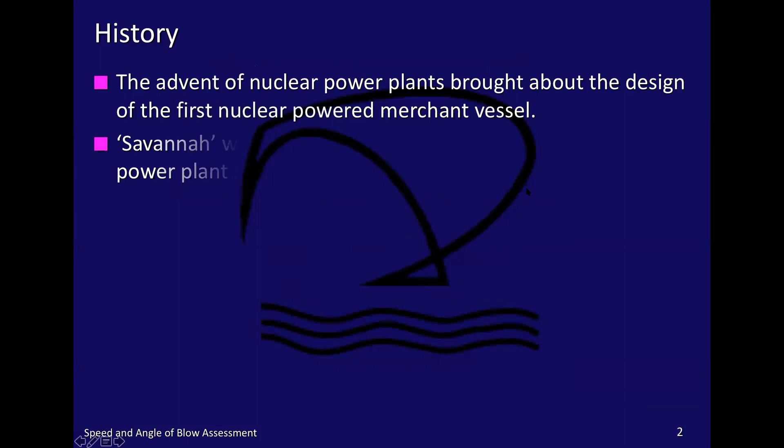Here we go. The history of speed and angle of blow assessment. With the advent of nuclear power plants, this brought about the design of the first nuclear-powered merchant vessel, which was the Savannah. She was launched in 1959 and designed with nuclear power plants supplying steam to turbines. That's the ship, and back in '59 she really was modernistic. She was more like an ocean-going trawler, really.

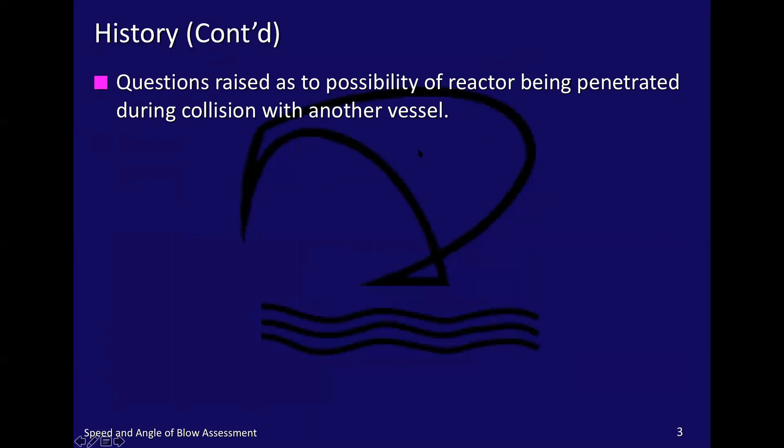But the problem was the possibility of a reactor being penetrated during a collision with another vessel, particularly with a naval vessel which might have a sharp bow. So the first research was carried out by Mr. Minorsky and later by Captain T.D. Halla. The research was carried out into the strength and scantlings requirements for nuclear vessels in order to safely absorb the kinetic energy of a collision, particularly with a warship which might have a sharper bow. Minorsky is seen as the authority on the subject, having derived a relatively simple methodology.

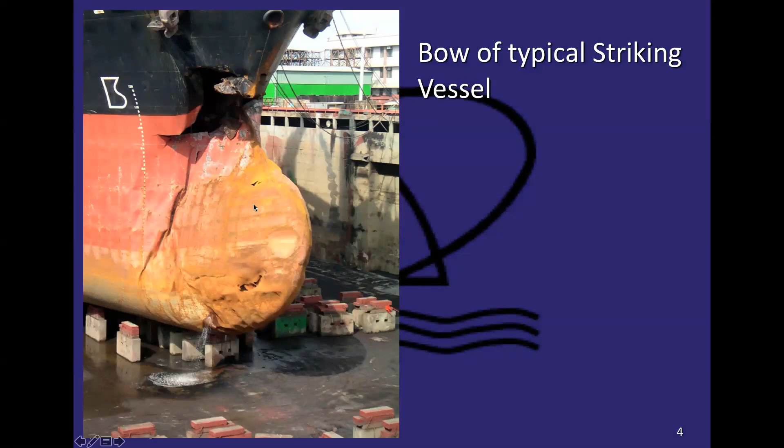So here we have the bow of a typical striking vessel. The bulb here has been moved back a couple of meters, moved up a little bit, and moved over to the port side slightly. This is the other vessel, the struck vessel. As you can see, I think this is number 3 and 4 holds, which now have beautiful indoor swimming pools.

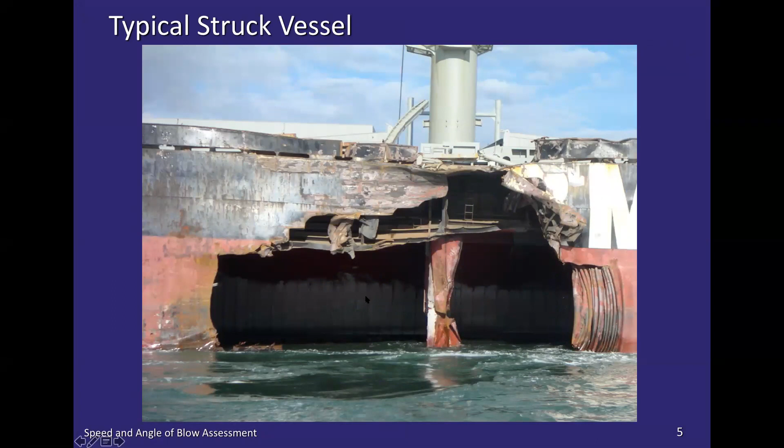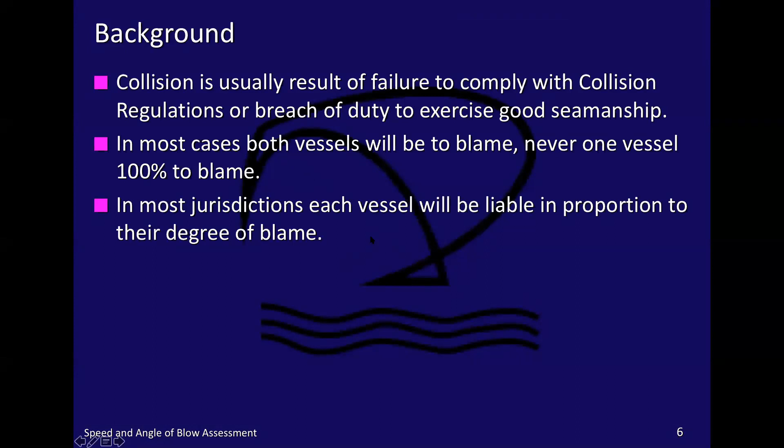The collision usually results from a failure to comply with collision regulations or a breach of duty to exercise good seamanship. In most cases, both vessels will be to blame, there never being one vessel 100% to blame. In most jurisdictions, each vessel will be liable in proportion to their degree of blame. The vessel claiming compensation for loss or damage will have the burden of proving the other vessel to be negligent. Consequently, events leading up to the collision must be established as far as possible. Witnesses interviewed, logbooks and records retained.

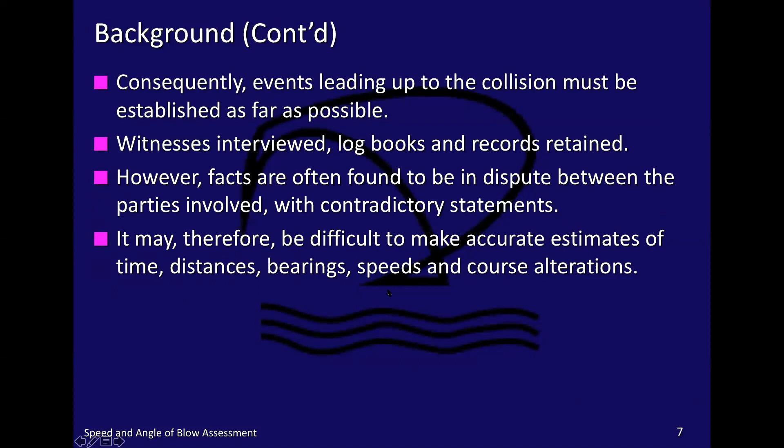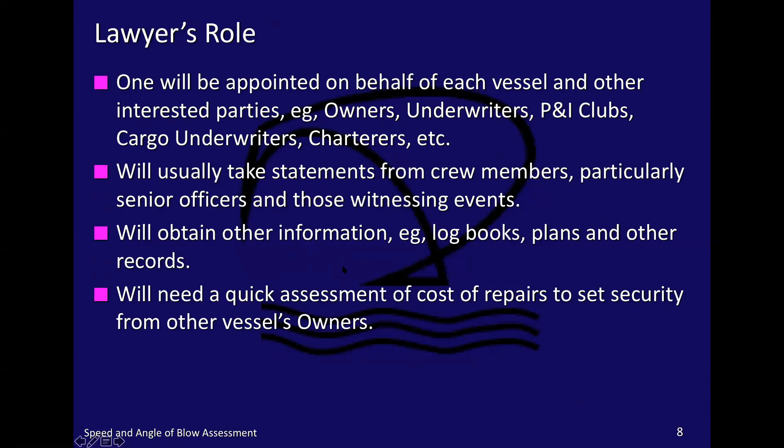However, the facts are often found to be in dispute between the parties involved, with contradictory statements. It may therefore be difficult to make accurate estimates of times, distances, bearings, speeds, and course alterations. A lawyer will be appointed on behalf of each vessel and other interested parties, for example, owners, underwriters, P&I clubs, cargo underwriters, and charterers, etc. He will usually take statements from crew members, particularly the senior officers and those witnessing the events. He will obtain other information, for example, the logbooks, the plans, and other records, which will be useful in our calculations. He will also need a quick assessment of cost of repairs to set security from the other vessel's owners.

The marine surveyor will be appointed by each of the parties representing the vessels. These, known as damage surveyors, will carry out nature and extent surveys of the damage. Each of the damage surveyors will usually be allowed to carry out a without prejudice survey on the other vessel, but not allowed to communicate with any of the crew. Each surveyor will then carry out calculations to estimate the extent and the cost of repairs, and they will also need various ship's plans to obtain the necessary information and carry out those calculations.

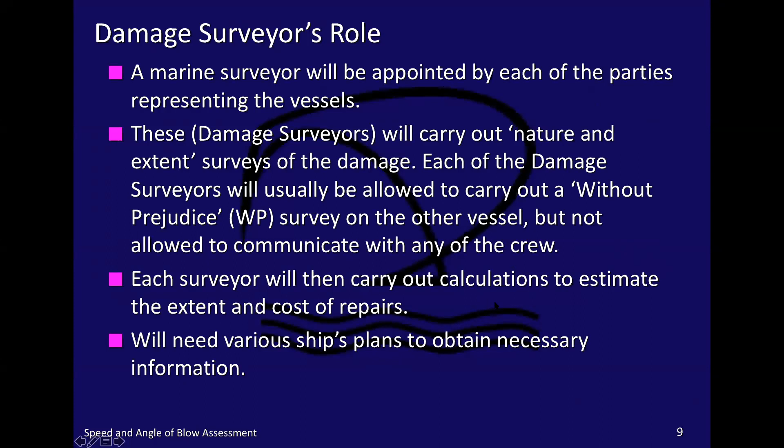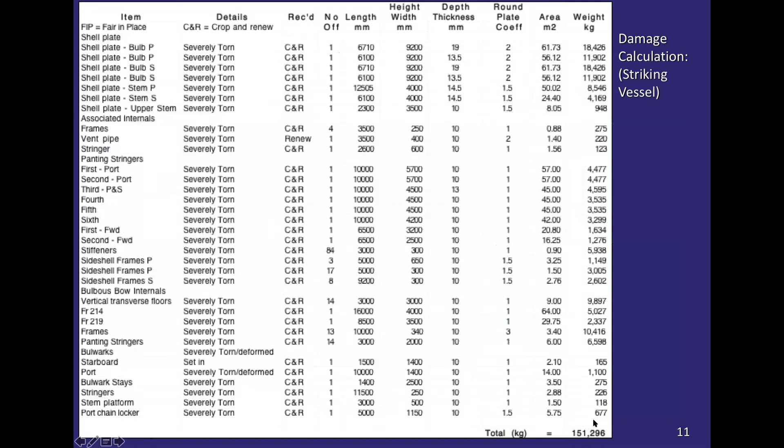And I'll explain why that is later. In the event that there is no agreement between the parties on the apportioning of blame, another marine surveyor or consultant will be appointed on behalf of each vessel. This is the speed and angle of blow analysis surveyor, or the SABA surveyor. And basically what he's doing, he's going to assess the damage and give an expert opinion as to the speed and angle of blow of the two vessels at the time of the collision.

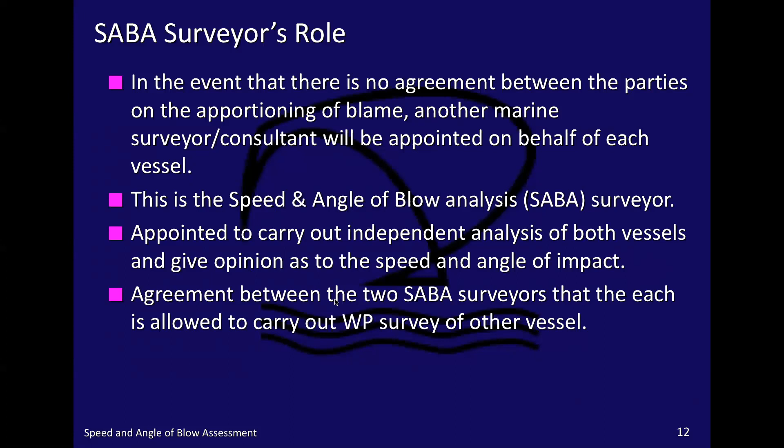He's appointed to carry out an independent analysis of both vessels and give an opinion as to speed and angle of impact. Agreement between the two SABA surveyors that each is allowed to carry out a WP survey of the other vessel. So they will look at one ship, assess the damage, carry out their calculations, brief calculations, and then they'll go over to the other ship and do the same thing.

Both surveyors are not allowed to communicate with the crew on either vessel. This is because their calculations are supposed to be based purely on the physical damage. Surveyors will measure the damaged areas in much the same way as the damage surveyors. However, they will also measure various angles and depths of penetration in relation to frame numbers.

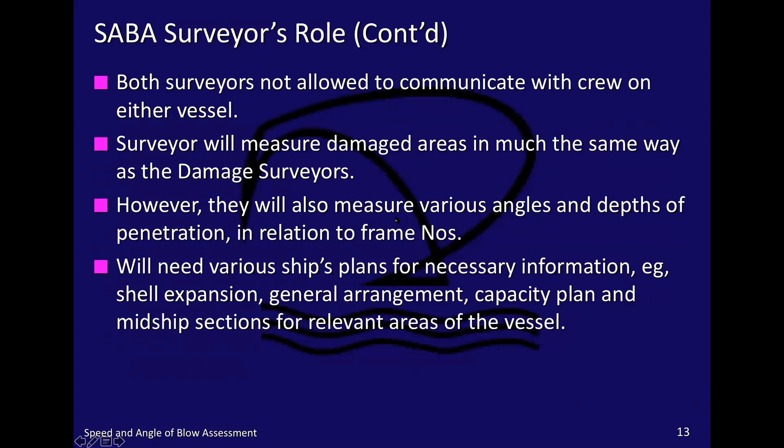They'll need various ship's plans for the necessary information, for example, the shell expansion, general arrangement, capacity plan, and midship sections for relevant areas of the vessel. The plans are usually obtained by the lawyers and distributed to the surveyors.

Scale plan drawings of each vessel are drawn, then fitted together to show the approximate positions of the two vessels at the time of impact. And of course, computerized drawing packages allow this very easily now. It can be on paper, but generally nowadays computerized. This will give a relative angle between the two vessels.

So on site, if you remember the two ships we just looked at, and we looked at the struck vessel, we went out there on a launch, and we were able, by moving the launch up and down the port side of the vessel, to get a rough angle of the collision. But then, of course, later we drew these drawings to confirm what that angle was. And this is how you put them together.

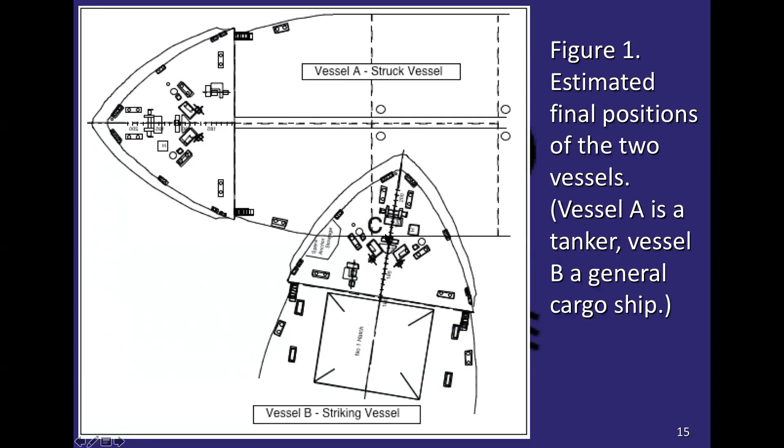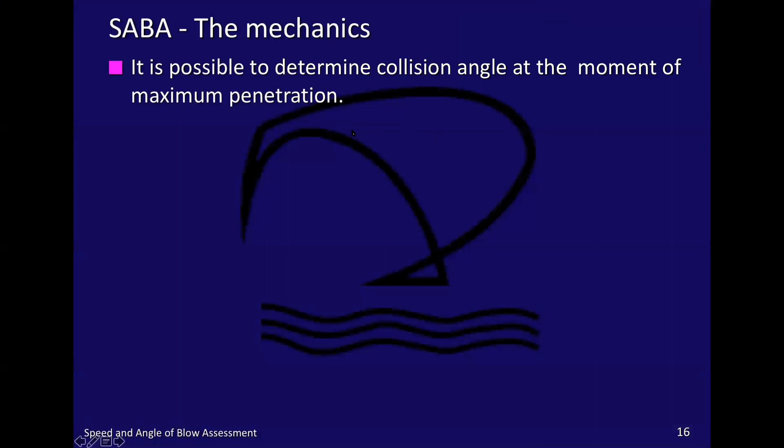So the mechanics. It's possible to determine the collision angle at the moment of maximum penetration. For all practical purposes, this will correspond to the actual collision angle, as penetration only takes a matter of a few seconds. For example, a vessel making 16 knots, striking another vessel on her side, and penetrating 9 meters into the hull before stopping, will have an average speed of about 8 knots or 4 meters per second. The penetration will take less than 3 seconds, such that the struck vessel will only turn a few degrees.

So the initial strike will be here. Because this vessel is moving forwards, this vessel will also start to turn in this direction due to the movement of Vessel A. And that's why you get this creasing of the shell plating here, as you saw previously.

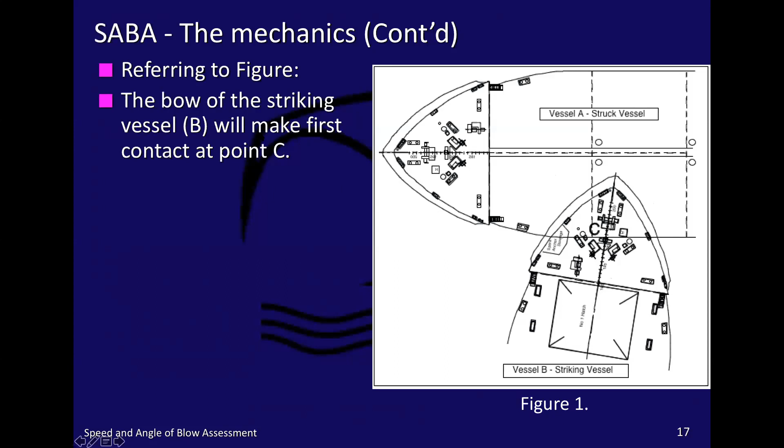The bow of the striking vessel will make its first contact at this point here, point C. And from that point, the shell plating would be cut along almost a straight line, making an angle of approximately 45 degrees. So this is the profile of the bow of the striking vessel cutting into the side shell plate of the struck vessel. And the angle of this section here will depend on the stem rake angle and the bow flare of the striking vessel.

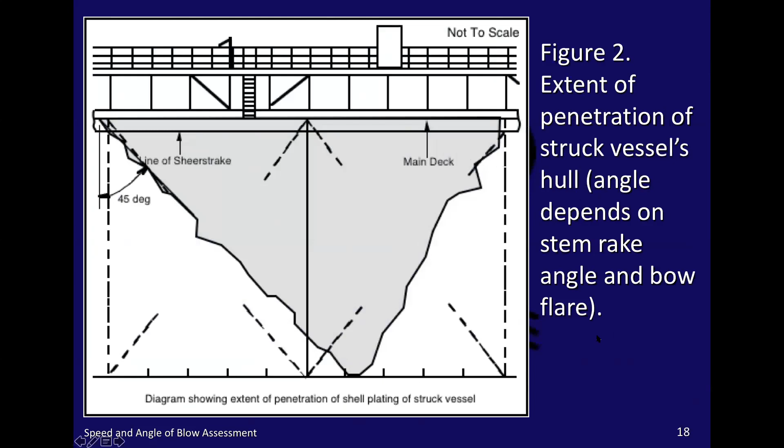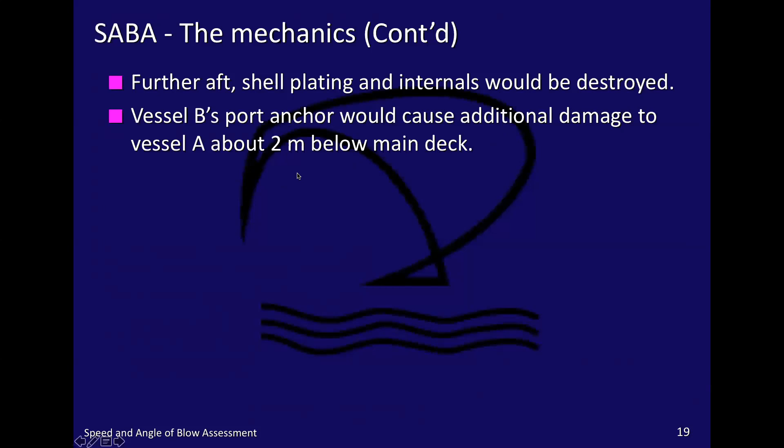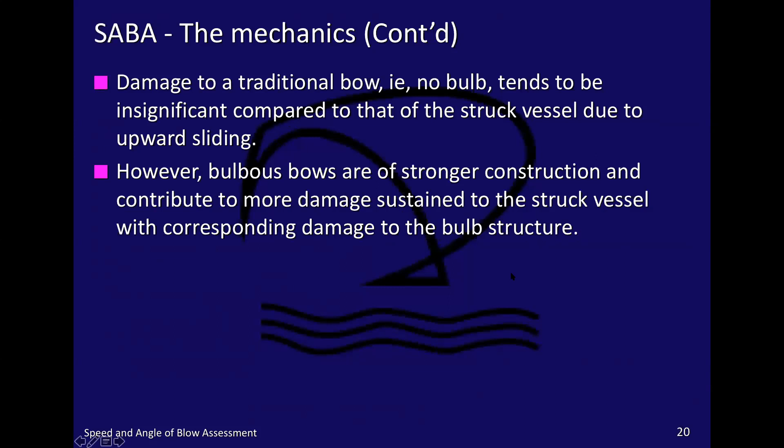Damage to a traditional bow, that is with no bulb, tends to be insignificant compared to that of the struck vessel due to upward sliding. However, bulbous bows are of stronger construction and contribute to more damage sustained to the struck vessel, with corresponding damage to the bulb structure. The bulb also reduces the upward movement of the bow during the collision. This may result in the cost of repairs being similar for the two vessels.

As we noted earlier, the amount of steel repairs was similar, cost similar obviously. That was because the striking vessel had a bulbous bow. And this shows why. So here's the striking vessel, here's the struck vessel. If this was a traditional bow, vessel B would have slid, it would have damaged the sheerstrake here, but it would also have ridden up over the side of the ship.

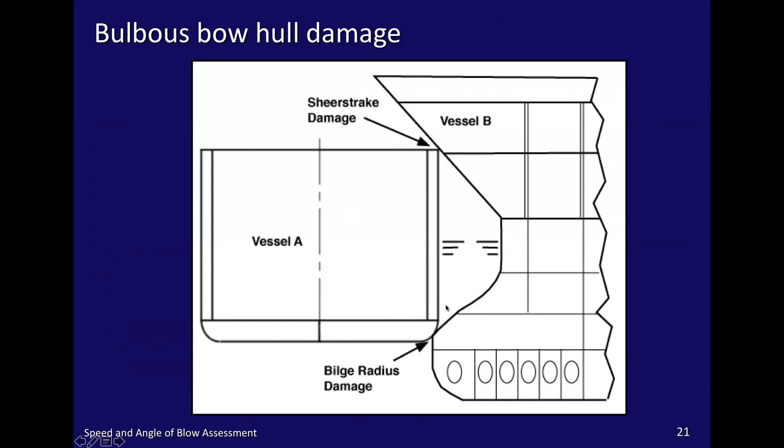But of course, because of the bulbous bow down here, it acts like a wedge and it damages both the sheerstrake and the rounded bilge, which contributes to the extra material required. And here's a shot of our striking vessel again with the bulbous bow moved up and back and over.

And when the bow strikes the decks, the heavy stringers, tank tops, double bottom tanks, and similar strong points break down and collapse. The decks of the struck vessel carve through the bow, so this is where the deck of the struck vessel has carved through the bow of the striking vessel and left a distinct horizontal cut.

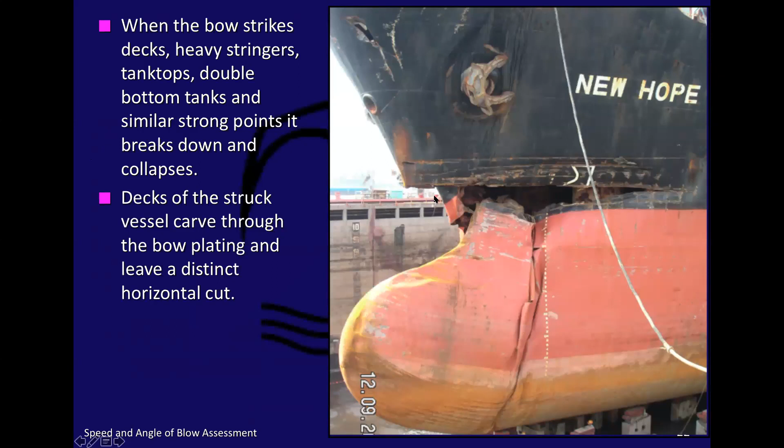This is a vessel in Japan involved in a collision with a bulk carrier. And this vessel is alongside, which makes it a lot easier, with a nice crease in the bow from the main deck, the sheerstrake, which makes it a lot easier to calculate the angle. So the position where the cuts end on each side of the bow, so that's here and here, of the striking vessel will give a good indication of the collision angle, providing the shell plating was straight.

That's the shell plating of the struck vessel. And if this is parallel body, then that's not a problem. If not, the curvature of the deck plating of the struck vessel must be taken into consideration. So when you're taking these measurements, they must be as exact as possible. You must use suitable points of reference, for example, frames, deck houses, hatches, bulkheads, or weld seams.

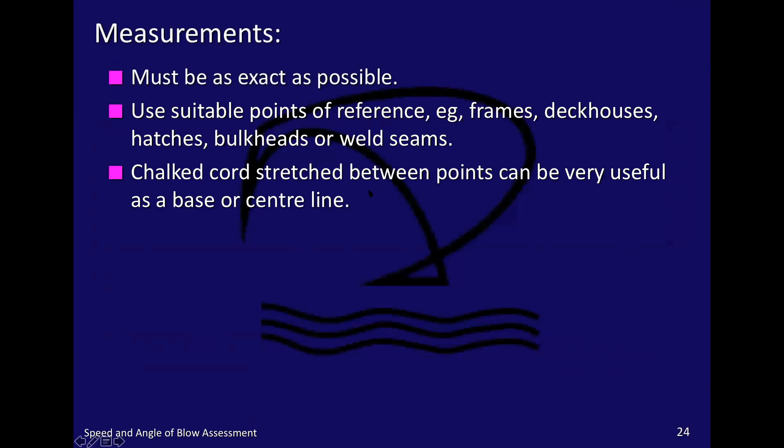A chalked cord stretched between points can be very useful as a base or center line. Measurements can be taken at right angles and at fixed distances along the line, e.g. along a center line with spacing equal to frame spacing. And photographs will assist later, particularly if taken at right angles to the object.

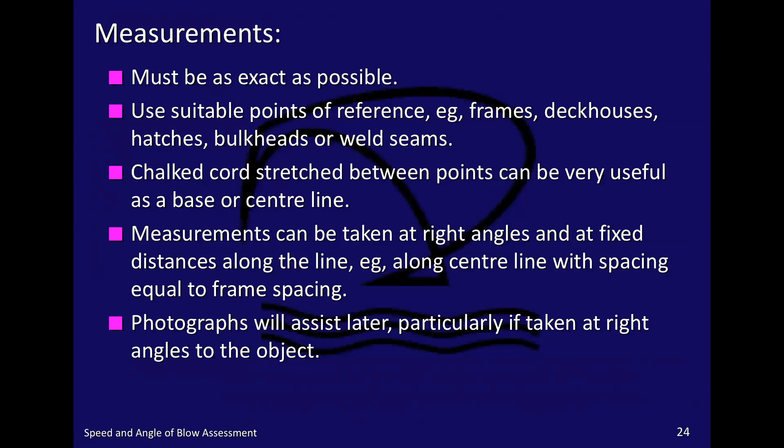So what you have is one side of a vessel obliterated. How are you going to measure the damage? Well, you draw a center line down the center line of the vessel with a chalk cord, and you measure from the cord to the damage, and then you can deduct that from the distances, the beam, half beam, using the vessel's drawings.

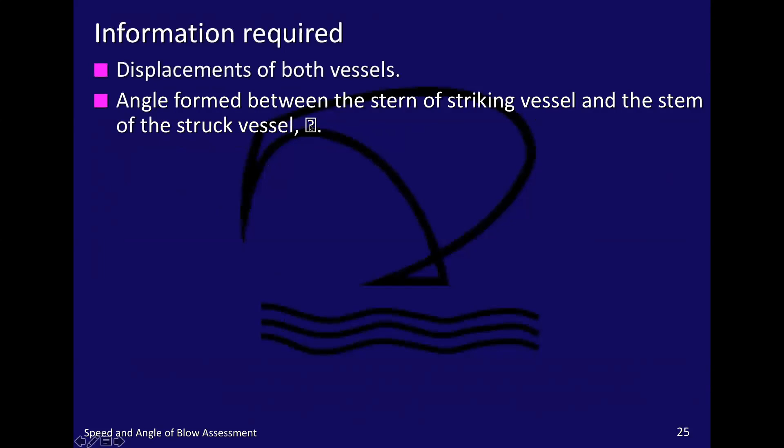You'll need the displacements of both vessels because the calculations involve momentum, which is mass and velocity. The angle formed between the stem of the striking vessel and the struck vessel, you'll see them on the drawings in a moment. Acute angle of turning of the deck plating on the leading edge of the struck vessel relative to her center line. So we need to know the striking vessel angle, the acute angle of the turning of the deck plating on the leading edge of the struck vessel relative to her center line.

The acute angle from the vertical passing through the lower extremity of the leading edge of the torn shell plate of the struck vessel. So that's alpha. We've got beta here. Anyway, the acute angle at the top of the bow the striking vessel makes to the vertical, beta, which is the stem rake.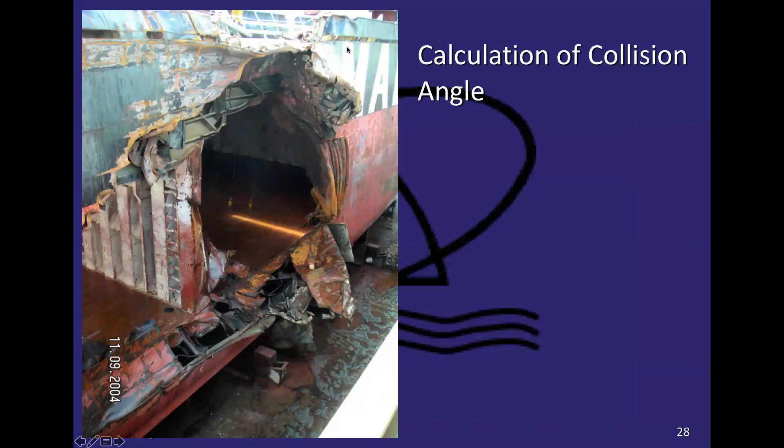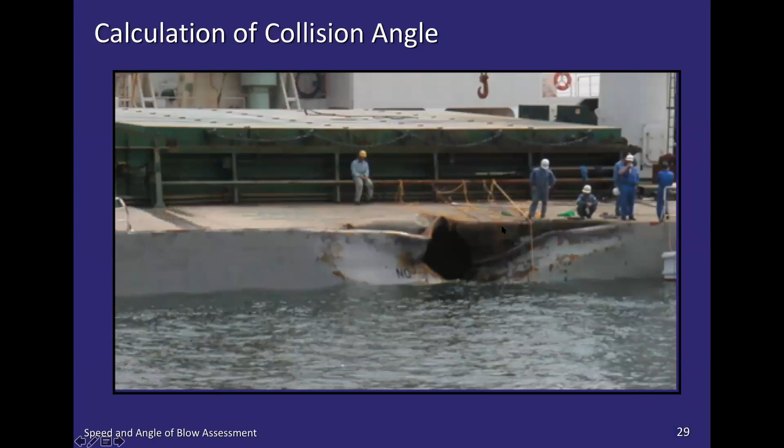This was the one in Japan with the general cargo ship, Vietnamese general cargo ship, when she struck the side of a bulk carrier. What happened there, as a matter of interest, was the two ships were traveling in parallel up under the bridge between the islands, and the master had been on autopilot, and he told the crew member to take the ship out of autopilot. Unfortunately, the wheel was full over to port, and she just veered around to port and went straight into the side of the other vessel.

And that's a closer angle of the damage, and this is basically the collision angle here. Sorry, go back again. The angle here. Okay.

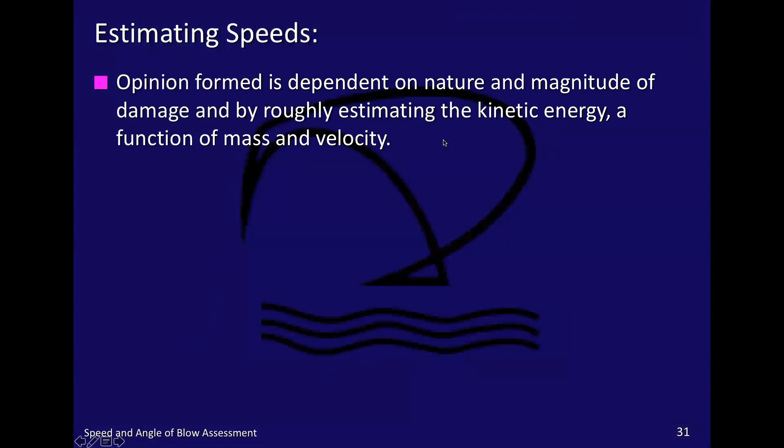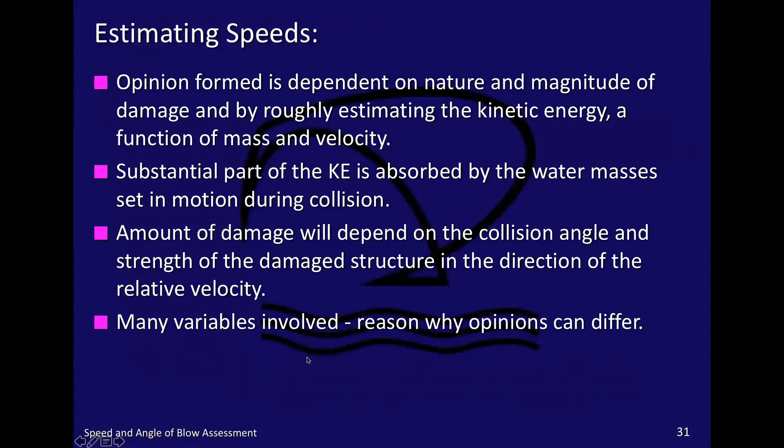Now, estimating the speeds. The opinion formed is dependent on the nature and magnitude of the damage, and by roughly estimating the kinetic energy, a function of mass and velocity. A substantial part of the kinetic energy is absorbed by the water masses set in motion during the collision, but that's equal on both vessels. And the amount of damage will depend on the collision angle and the strength of the damaged structure in the direction of the relative velocity. There are many variables involved, and this is why opinions can differ. So it's desirable to find a more precise method of estimating speed.

It's not possible to find the speed of each vessel separately, as damage is a result of the relative speeds of the two vessels. Now remember that we are doing this independently. We're getting no information from anywhere. We're not getting any information from VTS or from GPSs or anything like that. We're doing this cold with no other help at all. Obviously, that information can be used later to verify speeds, etc., if necessary.

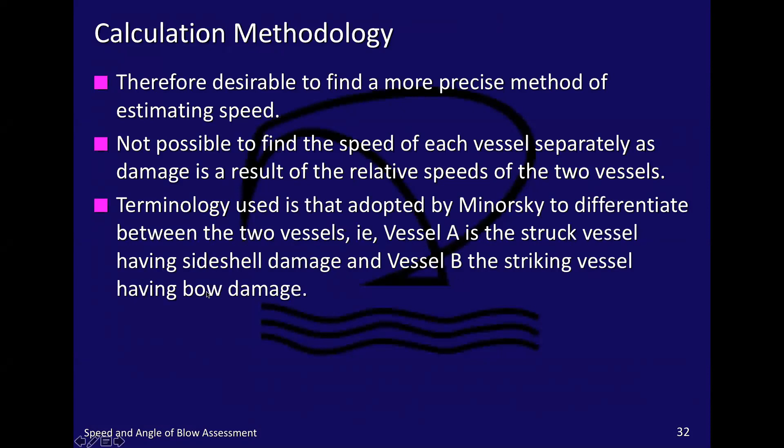The terminology used is that adopted by Minorsky to differentiate between the two vessels. That is to say, vessel A is the struck vessel, having side shell damage, and vessel B is the striking vessel, having bow damage. That's an interesting fact, that half of the vessels have bow damage, half the vessels have side damage. Minorsky states that the depth of penetration is a function of the relative velocities, displacements, the angle of blow, and the physical characteristics of the structural members, which have significant depth in line with the axis of penetration. These characteristics are expressed in terms of a single resistance factor called RT.

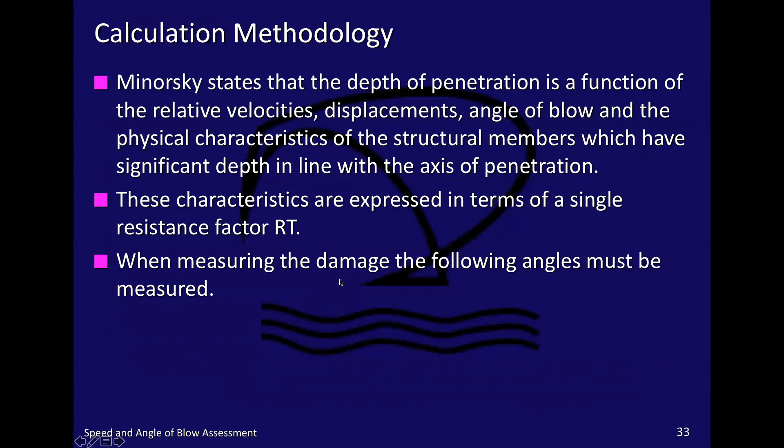When measuring the damage, the following angles must be measured. So remember, this is the side of our vessel with the imprint of the bow of the striking vessel. So alpha is the angle of damage formed by the bow of the striking vessel. And then beta is the angle due to the rake of the stem.

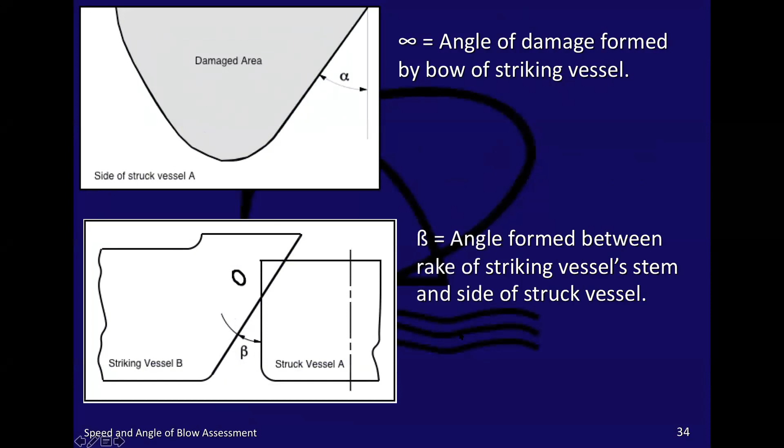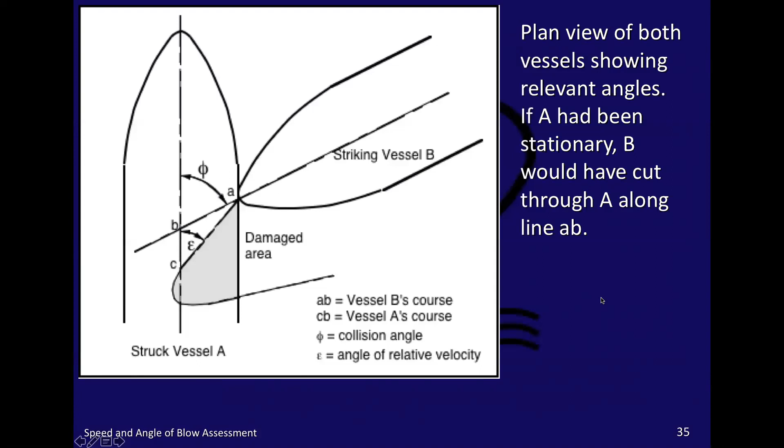Moving on. So now if we look at both vessels showing relevant angles, if A had been stationary, that's this vessel, B would have cut through A along that line AB, straight through there. But because this ship is moving forward, it slides backwards down this line here. Because A is making headway, the cut is found to be along the line AC. The first part of this cut will usually be a straight line and curved further in, indicating a change of speed ratio. So as she enters straight here, it may curve round a little bit due to the speed of the vessel heading in this direction and the two slowing.

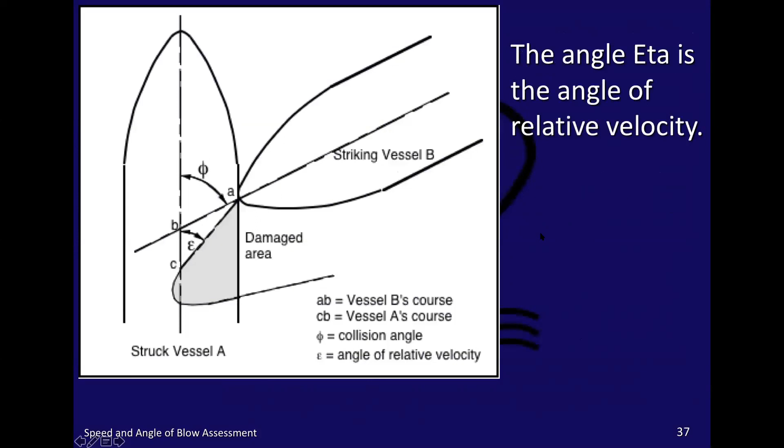The relative angle eta is the angle of relative velocity, that angle there. These are the two angles that we had a question mark before. So if measured where AC is straight, it will give the angle of relative velocity such that the speed ratio, vessel A over vessel B, is equal to sine of phi minus eta over sine eta. And those explain the angles.

Under the Hellesoe analysis, it's slightly different. He uses the profile of the striking vessel more, in that when B hits A initially, he strikes at point 1. Then as the striking vessel moves into vessel A, it moves the distance B. So this distance 2 here is equal to this distance here. The striking vessel hits the other vessel high up at point 1 first, and then further down at point 2 later, such that when point 2 makes contact, the striking vessel will have moved forward a distance B.

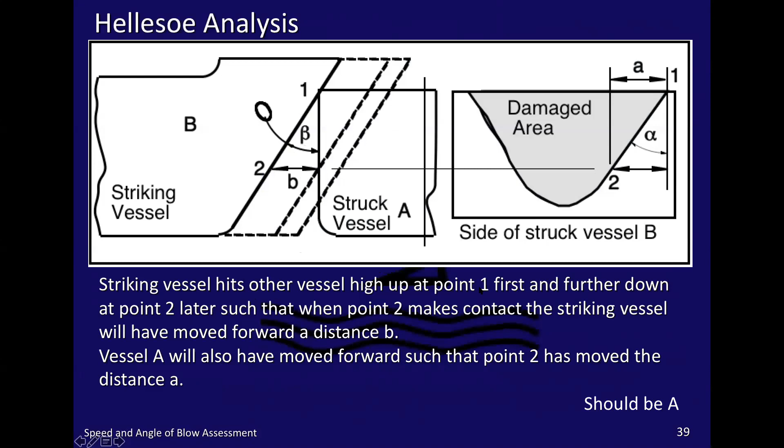Vessel A will also have moved forward so that point 2 has moved the distance A. Okay. That should be A, sorry, not B. Correction. So if you look at these, this is the Hellesoe calculation. So vessel A's speed over vessel B's speed is tan of alpha over tan of beta.

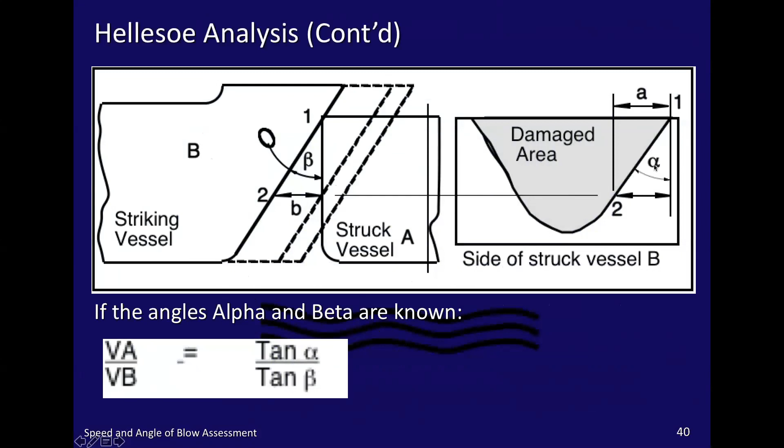Now, let's have a look at the energy dissipated in the collision, because this is critical. Minorsky obtained the data from 50 collisions from the US Coast Guard for his calculations. These included speeds, angles of encounter, displacements, and drafts, together with the location of damage. So this clearly was evidence after collisions had been carried out and all the facts had been found. So these were historic records.

Some were eliminated due to the lack of precise structural data, and collisions with too sharp an angle of encounter were also eliminated. That's because at a right angle collision, the material resisting is at right angles. But if you start to vary the angle more and more, the resistance is not then the same. 26 collisions in the end were analysed for kinetic energy and the extent of damage.

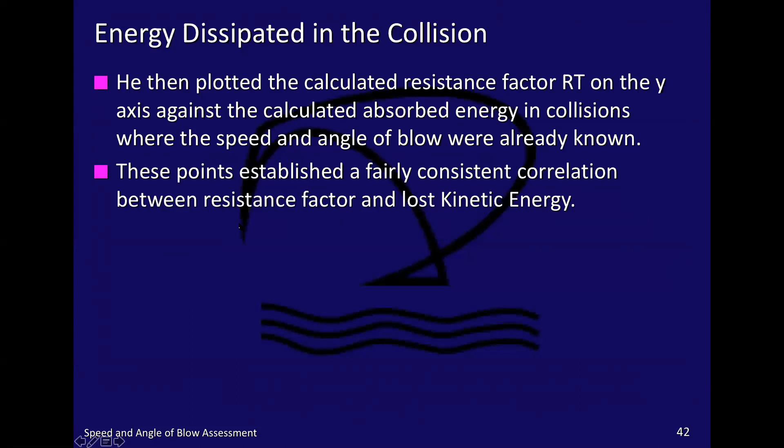He then plotted the calculated resistance factor RT, so this is calculated from the damage to the vessel, as we'll see, on the y-axis, against the calculated absorbed energy in collisions where the speed and angle of blow were already known. These points established a fairly consistent correlation between resistance factor and lost kinetic energy. There was considerable scattering of points at low speeds, and more damage was done than anticipated from the speeds involved. This is shown as the crosshatched area in the following graph.

So here's the graph. So these are the low energy points, low speed, low energy, and these are the other 27 that he had plotted. So resistance factor is up this vertical scale, the kinetic energy along the horizontal scale, and he came out with an empirical formula: E equals 414.5 times RT plus 121,900 tons knots squared. So that's the empirical formula.

So from the plotting of the collisions, this one was for 10 to 16 knots. And then what he did was he actually did plot the lower ones and worked out that with this calculation, this was for vessels traveling below 10 knots. Okay.

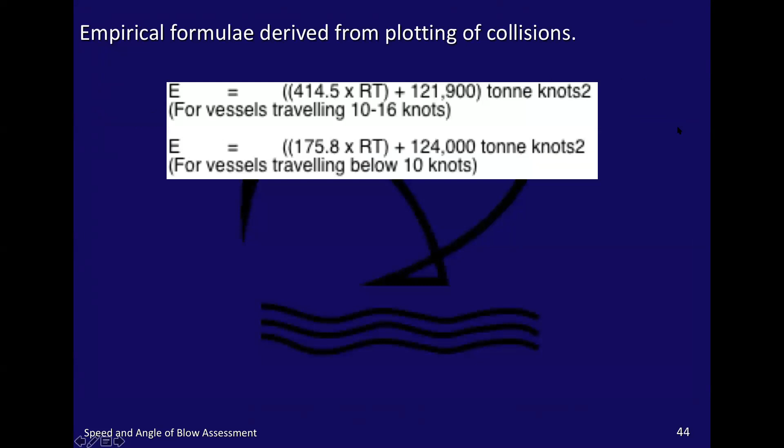So it states the kinetic energy absorbed in the collision. Let's go back a couple of steps. So this is our first formula. Remember this formula here. They also calculated that the energy absorbed in a collision between two floating bodies approximates to: energy equals the displacement of A times the displacement of B, times (the velocity of B times sine phi) squared, over 1.43 times (displacement of B plus 2 times displacement of A).

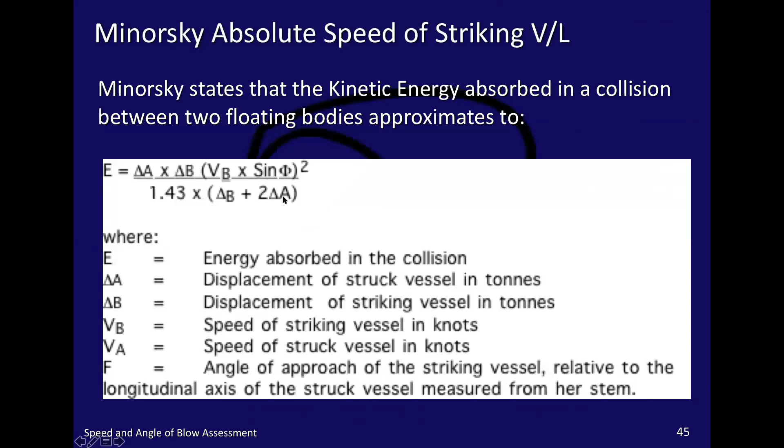Okay, moving on. So remember our first equation that he got from the empirical formula? So you can equate these two now. Now, we know displacement A, we know displacement B, and we're going to calculate RT in a moment. So if we know the angle, we'll get our velocity out. So knowing displacement and angle, and by calculating RT, we can find VB.

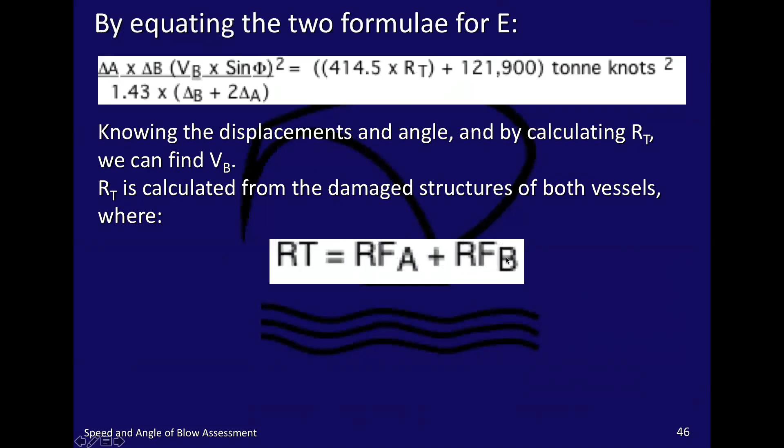RT is calculated for the damaged structures of both vessels, where RT is the resistance factor of A plus the resistance factor of B, where RFA is the resistance factor of the struck vessel structure and RFB is the resistance factor of the striking vessel structure. So on vessel A, the struck vessel, the structures considered for RT are the decks. So this is the horizontal material, which is going to be resisting the bow as it comes in and cuts in. And horizontal sections of frames, vertical sections of frames, and stringers.

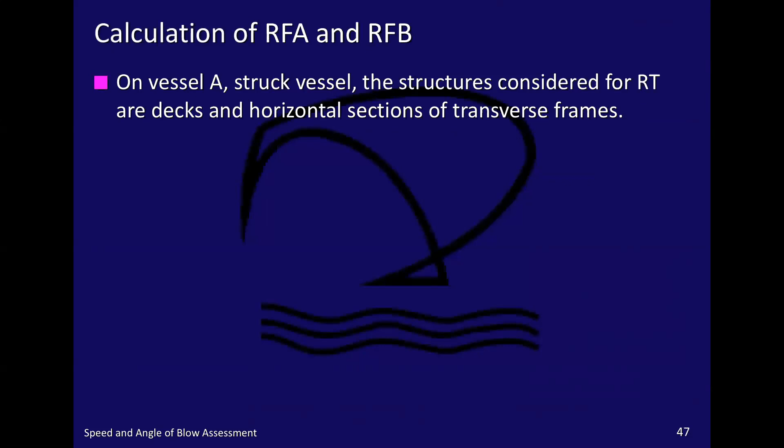On vessel B, they comprise the stem plate. So you've got the stem plate, which is reinforced. The forecastle intermediate decks, so you've got the decks at different levels in the forecastle store, forepeak, and then you've got the centerline girder and the stem girder. This is the key to the calculations: knowing which material you have to go and measure to find out the extent of the resistance.

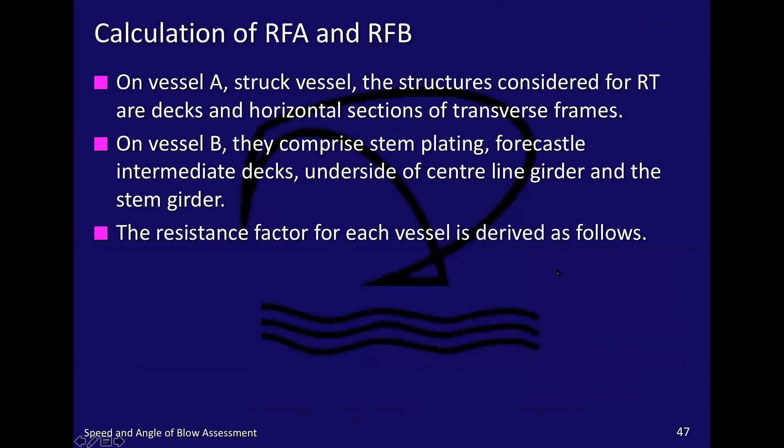The resistance factor for each vessel is derived as follows. So it's tabulated. It's quite simple. You take the deck. This is the penetration times the length times the thickness of the material, and that will give an RFA. This is for vessel A, where P is the maximum depth of penetration. Note these are in imperial units. L is maximum length of damage at shell, and T is the thickness of the member.

For vessel B, this is obviously the striking vessel. It's going to be the centerline girder, intermediate decks, and stem girder. Again, penetration, length, and thickness. And then if there's any shell damage, of course, that's also resisting.

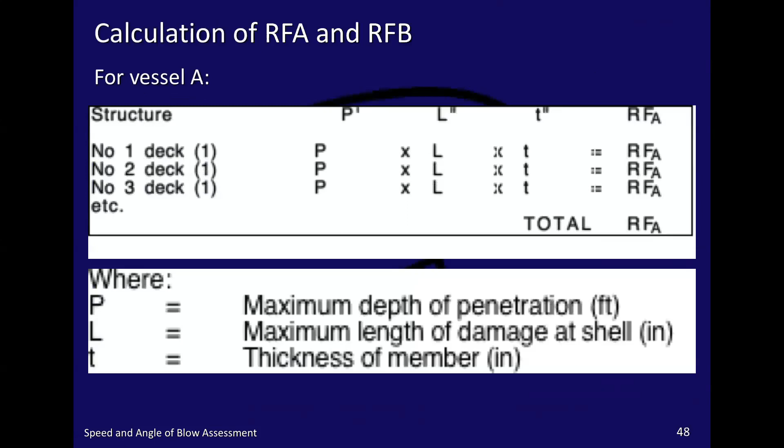So, if you note, we have some notes there. Where are the notes gone? No, we didn't do it. Never mind. Okay.

So the thickness of the transverse frames is distributed over the maximum width of penetration at the ship's side, and may be added to the thickness of the deck plating. The geometry of the girders is assessed as an equivalent flat plate, for example, the volume of the offset bulb plate being added as a flat plate. So if you have OBP frames, OBP beams, that little bulb on the end or offset bulb is additional material. You can add it on as flat plate.

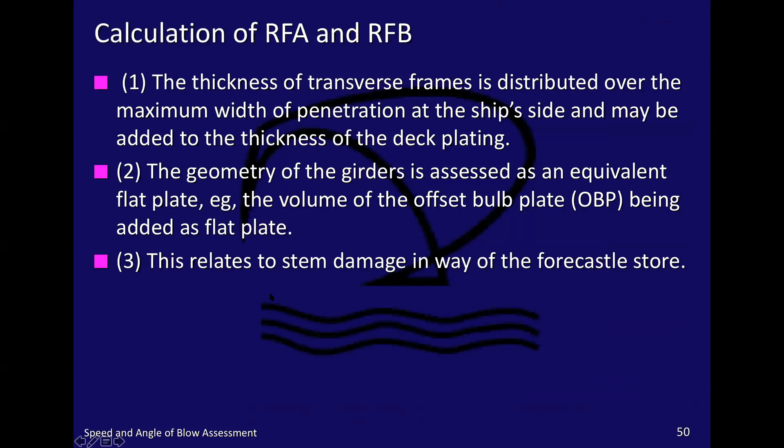And then stem damage where the forecastle is, that's also included. It should be noted the above calculation uses imperial units as the initial work was carried out before SI units were adopted internationally. Consequently, when using Minorsky's method, a conversion factor must be applied to make allowance for the use of SI units. So the above tables may thus be represented as,

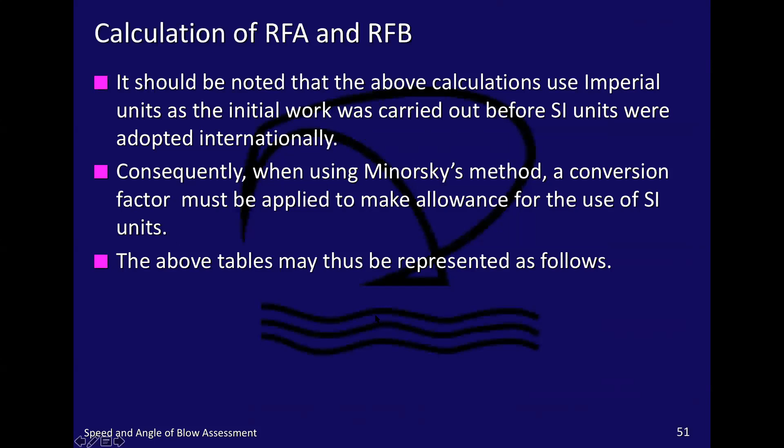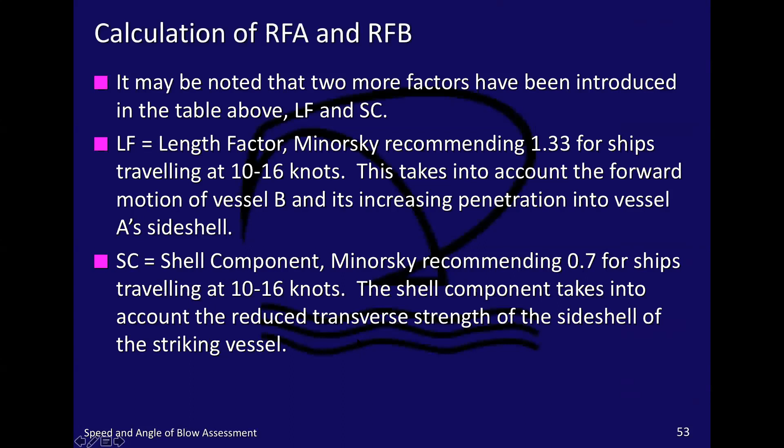So what you will need to do here, of course, is if this is mid-voyage, you will need to take the condition at departure port and subtract consumptions for fuel, fresh water, etc. Same with both vessels. Then we've put in the angles, so that should be epsilon, 25 degrees, converted into radians, because we use radians when we're calculating. Phi, the angle of blow from the observation, which we thought was 55. Acute angle from the vertical passing, so that was alpha, 47 degrees. And the acute angle of the vessel strike, that's the vertical, in other words, the

rake of the bow. Now remember here that ships tend to be trimmed by the stern. So if you've got a 1.5 meter trim by the stern, the angle of the rake reduces. So you have to also calculate how much that angle is reduced to make it accurate. Sorry.

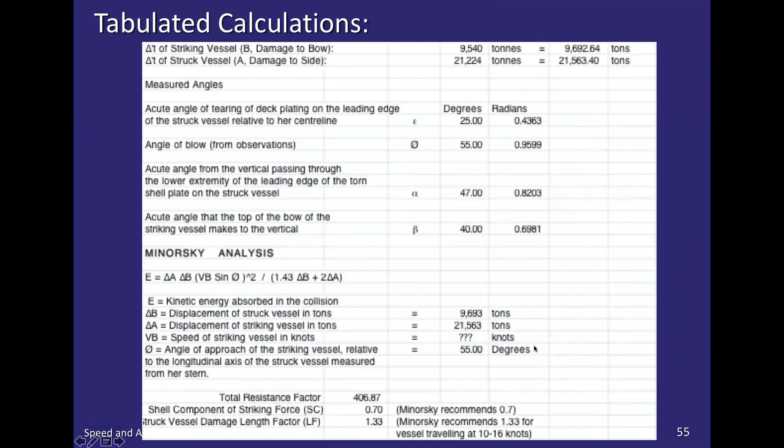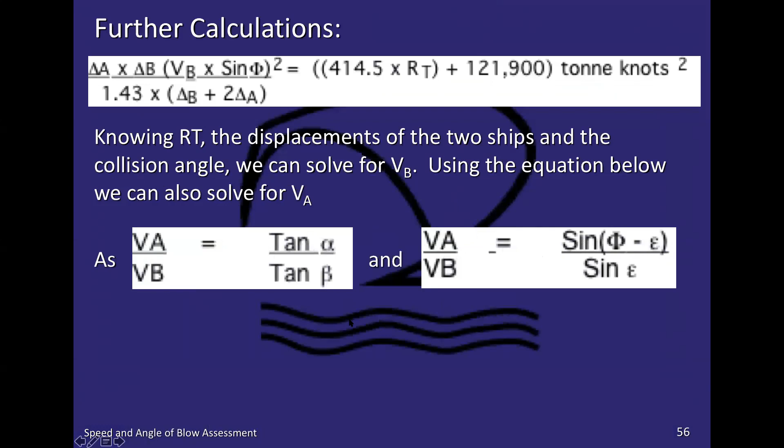Quite straightforward. Saves a lot of time and energy. If you want a copy of that, you can get in touch with me.

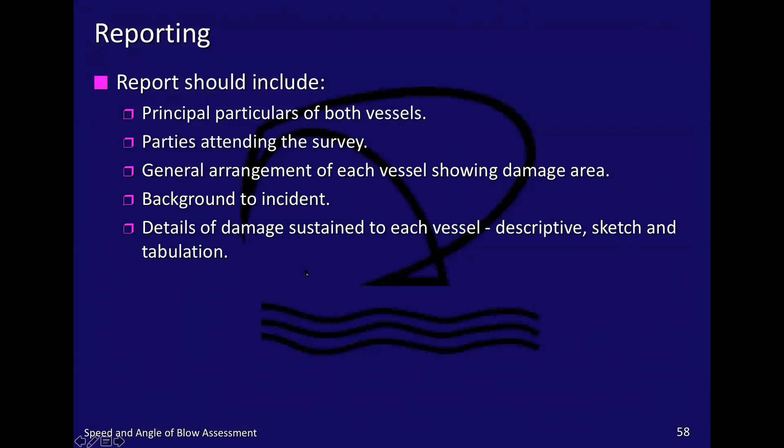Now you have to put a report together, which is basically an expert opinion. So the report should include principal particulars of both vessels, the parties attending the surveys, obviously, general arrangements of each vessel showing the damaged areas, background to the incident, details of the damage sustained to each vessel, basically descriptive with maybe a sketch, and you could use that table of found and recommended as well.

The angle of blow assessment is a breakdown of the collision with evidentiary damage. And then you have to give the information you've used, so the drafts of both the vessels and displacements. It should include also the availability of any supporting evidence that may be available from external sources, but you wouldn't use these until after you've carried out your calculations, right?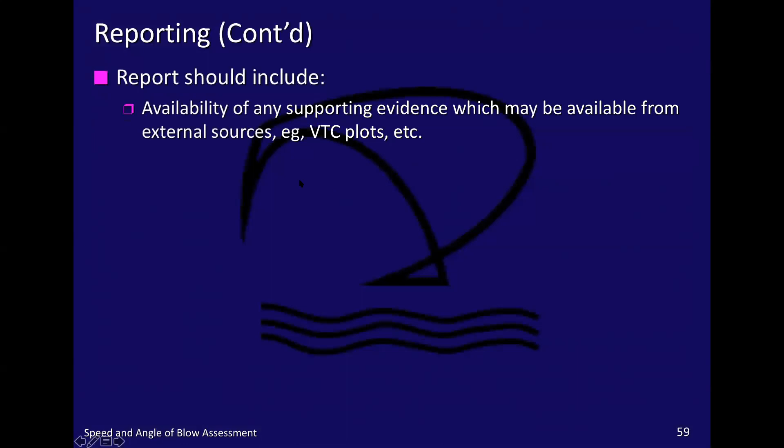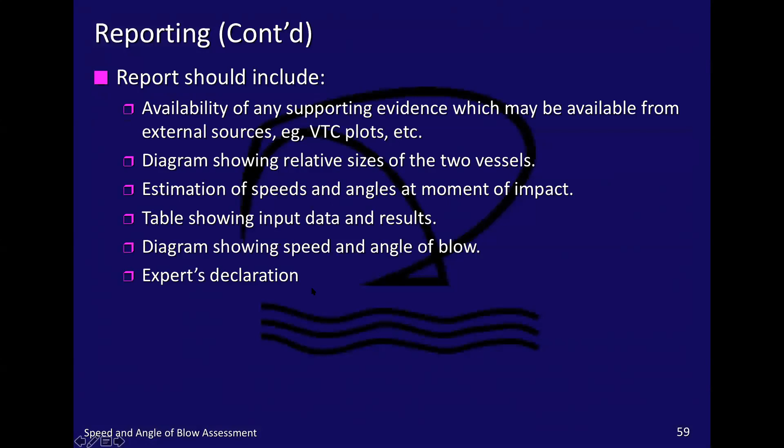Diagrams showing relative sizes of the two vessels, the estimation of the speeds and angles at the moment of impact, table showing input data and results, and a diagram showing the speed and angle of blow. Then you have to give your expert's declaration, which basically says, I did this, nobody interfered, this is my opinion only, and I'm basically a servant of the court and not of my client. Okay, and I understand I'm going to be cross-examined if we do go to court. Those of you who do expert witness work or expert opinion work will already know this.

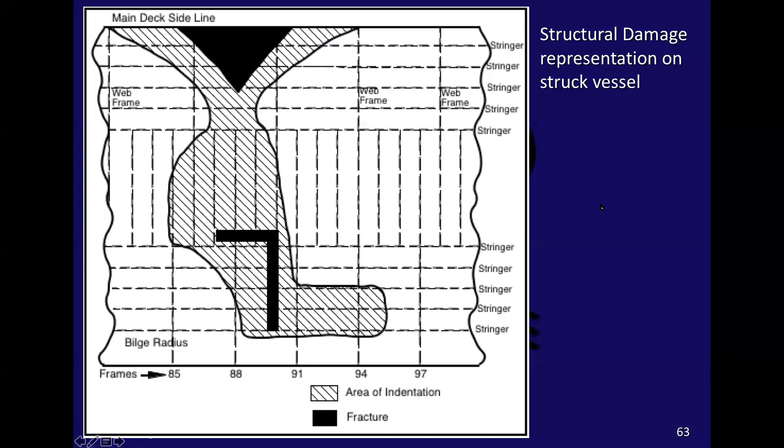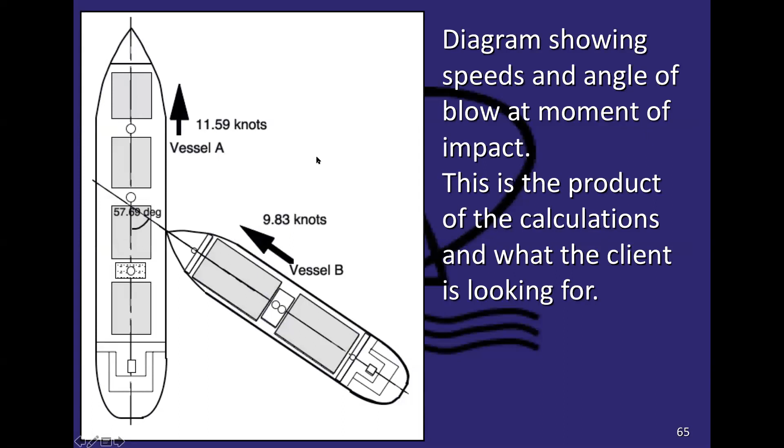And then you have to show the relative sizes and drafts of the two vessels, and that will explain why you've got damage in certain areas. Then this is your diagram showing the speed and angle of blow at the moment of impact. And this is the product of your calculations and what the client is looking for. So vessel A was traveling at roughly 11.59 knots. Vessel B was about 9.83 knots. And this is the angle, which was 57.69 degrees. That's what he's looking for. That's what you get paid the film star wages for. And you show these angles also. These are the angles that you've used in the calculations.

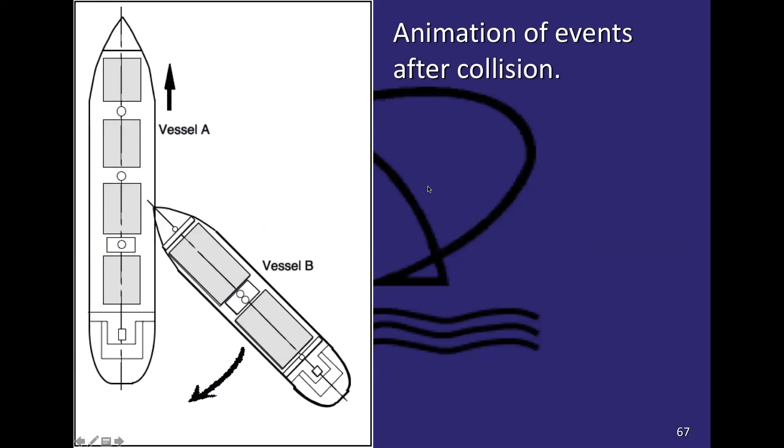Now, it's also useful, because there will be other damage down the side of the vessel or in the bow of the vessel, to show the damage which occurred after the event. So, come on, there we go. So this is colliding. So you see vessel B is now drifting down the starboard side of the struck vessel, until you get separation.

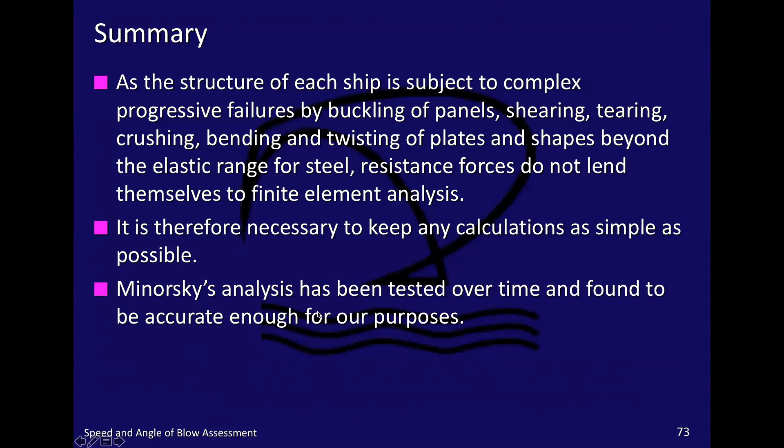So, summarizing. As the structure of each ship is subject to complex progressive failures by buckling of panels, shearing, tearing, crushing, bending, and twisting of plates, and I'm not going to add any sound effects here, and shapes beyond the elastic range for steel, resistance forces do not lend themselves to a finite element analysis. It's therefore necessary to keep any calculations as simple as possible. And that's where Minorsky's analysis has been tested over time and found to be accurate enough for our purposes.

To ensure appropriate results, the input information must be accurate. This will give confidence in the results. And using spreadsheets will allow the automation of the calculations, as I've showed you. Diagrams and graphics will assist in reporting and understanding by principals. It's advisable to learn how to measure and carry out calculations under an experienced proponent of the subject, which is unfortunate because if collisions occur, the lawyers usually want you out there as soon as possible. You don't have time to phone your friend and invite him to come from Manila or wherever to witness what's going on.

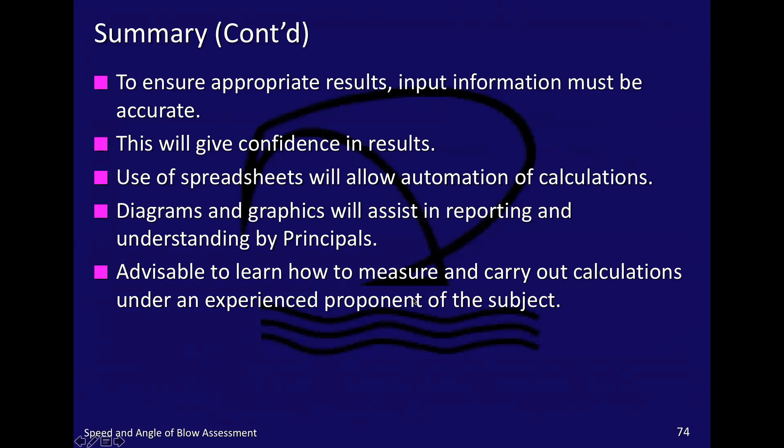So further, with the introduction of navigational simulators, it's now possible to completely automate the scenario. Successful tests have been carried out using the Transas Maritime Simulator software on a laptop. Key parameters for the two vessels can be input to the software. It's followed by the scenario stated by the master of ship A, then that for ship B. When run to its conclusion, it's likely the two vessels will miss each other completely.

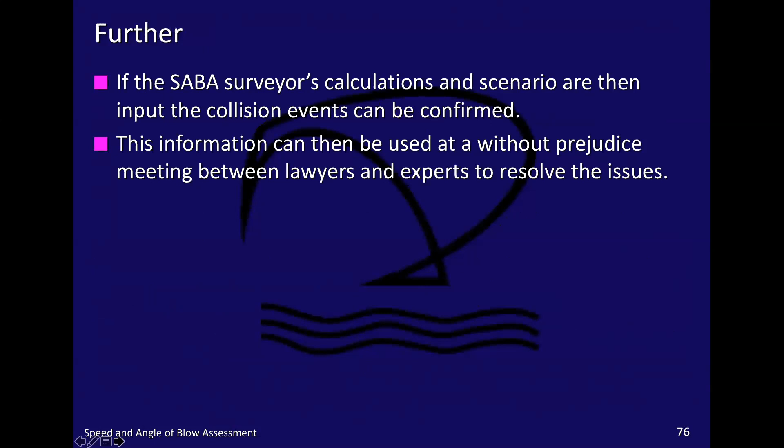If the surveyor's calculations and scenario are then input, the collision events can be confirmed. This information can then be used at a without prejudice meeting between lawyers and experts to resolve the issues. Not yet tested in court, however.

Other information: I've mentioned that we've designed a spreadsheet which you put the information into, that is, the angles used in the calculations, displacements of the two vessels, as I showed you, estimated angle of blow, damage measurements. The results are then shown in an output table giving the absolute speeds and angle of blow.

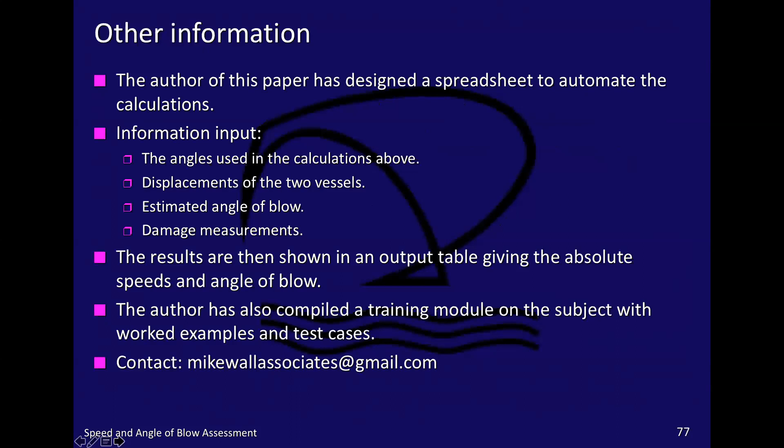Moving on. Due to the methodology employed in these calculations, I call this method the 3S system, which most of you will know means simple sums for sailors.

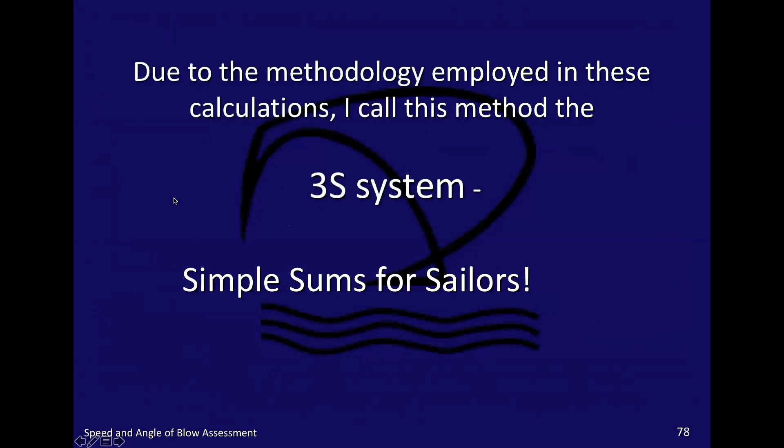Okay, so I have one more I want to share with you. Okay, quickly before we finish,

if you're involved in the investigation of collisions, very often, and obviously after the fact, it's very difficult to give visual representations of what's going on. So the simplest way of doing this is using the old flip card methodology, where you used to flip through cards and see a movie happening. You can do this very easily with PowerPoint by staggering the slides half a second.

So here we have a case of a large container vessel coming out of Busan, almost up to full speed. And this small Russian-Ukrainian trawler had been in for 3 months doing repairs and was out undergoing trials. She was doing about 10 knots. And the Iran Command was doing about 17 to 18 knots.

The structure of this vessel had these side structures with the working deck between, which meant for the master to see what was going on behind him, he had to walk out onto the starboard bridge wing and look over his shoulder. And he did this, and he saw the Iran Command coming down towards him and about to sink him. So he initially turned to port to get away from the Iran Command, but then he put his stern directly in line with the Iran Command, and then he realized he was going to be overridden very easily.

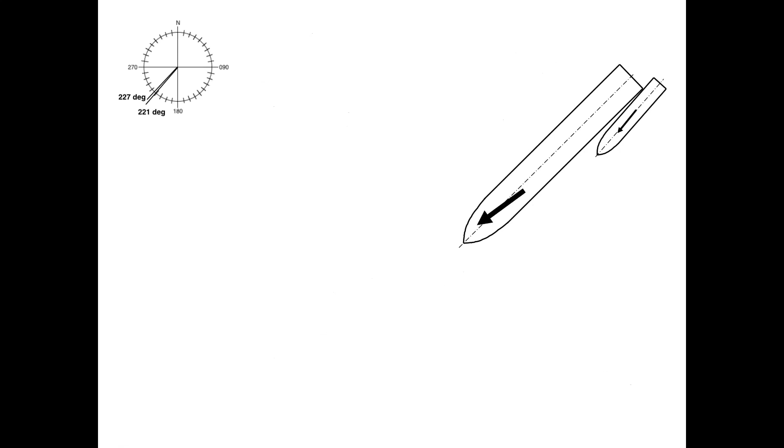So these are the events. These are the relative speeds of the two vessels, Iran Command, Sea Wind coming down. As she comes passing her, you get the interaction between the two vessels, so she gets sucked into the side of the container vessel. The second mate on the bridge then realizes something's going on and shouts, "Starboard!" So the ship goes to starboard, smacks the side of the trawler, and takes off. And he didn't stop either. He kept going. And this was the resulting damage to the trawler.

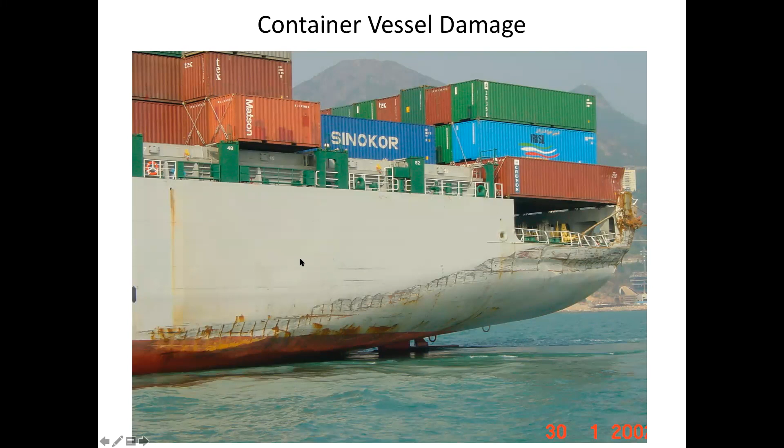The Iran Command, when we caught her in Hong Kong, you can see the damage here from the strike, the collision. And we went on board to interview the officers. "No, we were nowhere near it, sir. Nowhere near it, sir. No." So I said, well, if that's the case, do you think we can have our door back, please? That's actually the door off the ice-making machine on the back of Sea Wind 1. Okay, so case closed, and the whole case was resolved.